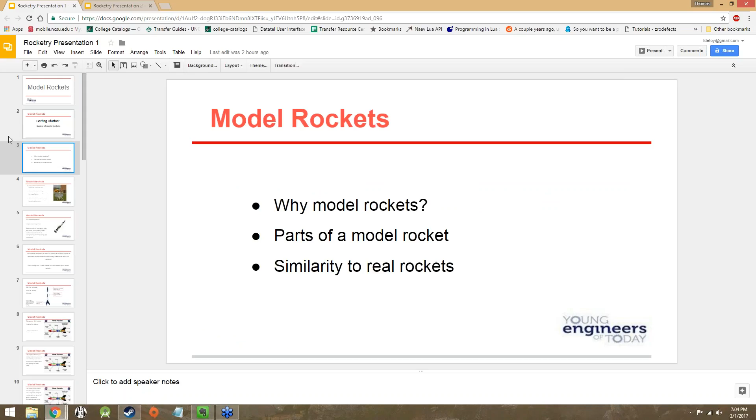So anyway, on Monday we went over just model rockets in general, why and the parts and the similarity to real rockets, sort of. We'll go a little bit more over the similarity to real rockets. There's not a whole lot more there though. But yeah, model rockets are smaller versions of rockets used in spaceflight, hence model. Duh. Many of them emulate early rocket designs, however they can be whatever you want if you're patient enough, like this little model of a Saturn V here, because you can customize them to make them look like really whatever you want. Within reason, obviously.

You can't make like a bowling ball or something like that because it's not really going to fly all that well, even with model rocket engines. I'm sure if you slapped on enough, but I don't think you want to slap a bunch of model rocket engines on a bowling ball and let that thing fly, because then you've got a very fast moving bowling ball, and that would just be bad for everybody involved. But for the most part, there is a certain degree of customization that model rockets offer.

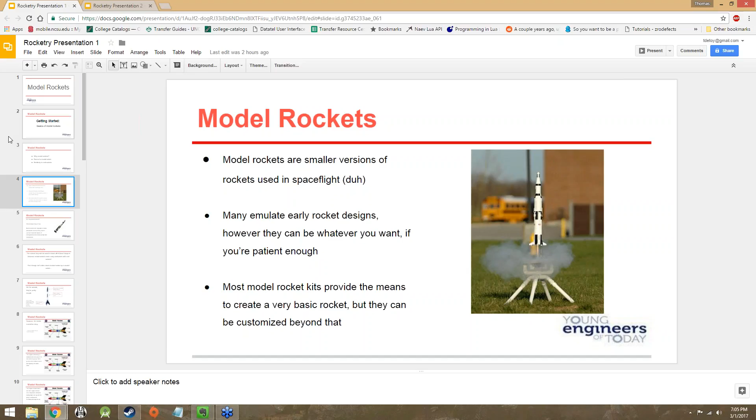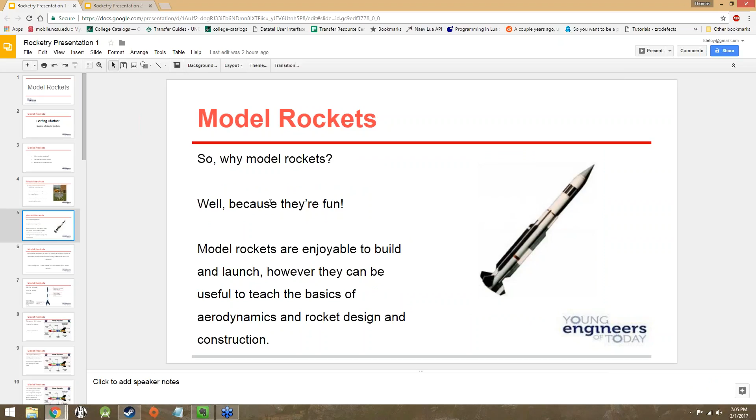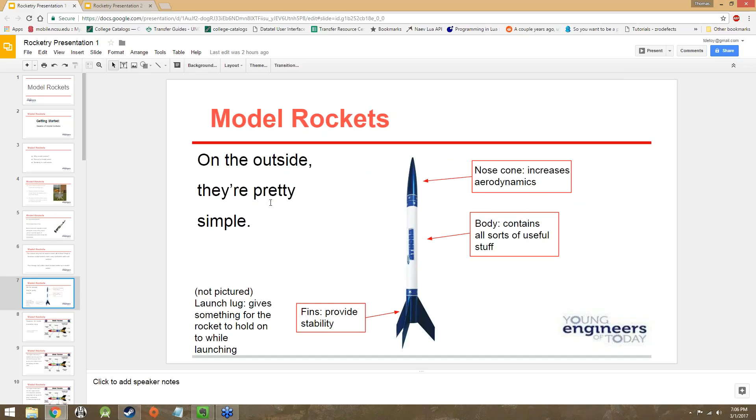And why specifically? Well, because they're fun. They're enjoyable to build and launch, but they can be useful to teach the basics of aerodynamics and rocket design and construction. So there's that as well. The reason they can be used to teach all these things is because model rockets share a lot of similarities with real rockets. A model rocket basically has a nose cone, a body, and fins. No surprise there. Fins provide stability. The body contains all of the recovery systems and everything like that. The nose cone increases the aerodynamics of the rocket, decreases the drag.

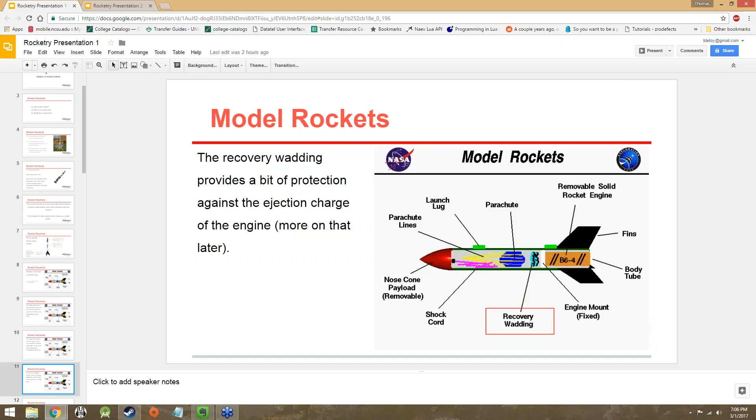The inside, though, you're going to have your engine and your parachute or some sort of recovery system, your shock cord, things like that, the engine mounts. Basically, the engine makes it go up. The engine mount makes sure that the engine doesn't go anywhere. The recovery wadding makes sure that when the engine deploys its ejection charge, that is to say, its blast in the direction that goes inside the rocket, the recovery wadding absorbs a lot of that heat and force, enough so that the parachute and stuff like that isn't damaged, but it still deploys.

The parachute or the recovery system in general makes sure that the rocket floats down more or less gently as opposed to just crashing down to the ground and getting damaged. Shock cord keeps the nose cone connected to the rocket, ensures that the nose cone being blown off doesn't actually stress the rocket body or the rocket in any way. Parachute lines keep the parachute attached. Duh. Launch lugs keep the rocket attached to the launch rail so that when it's lifting off, it has enough time to gather speed to allow the fins to be effective.

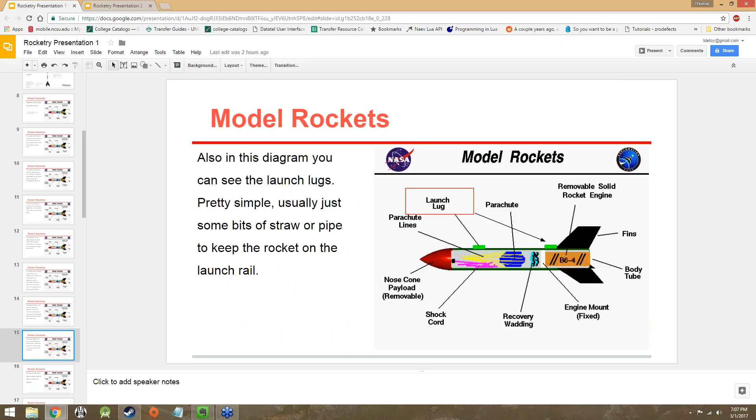And then we talked about what was actually inside of the engine itself. The model rocket engine itself tends to have a few stages to it. There is, of course, the clay nozzle, which provides a bit of directed thrust so that the rocket will actually have more thrust downwards so that it will go up more effectively and faster. The propellant is basically the rocket fuel.

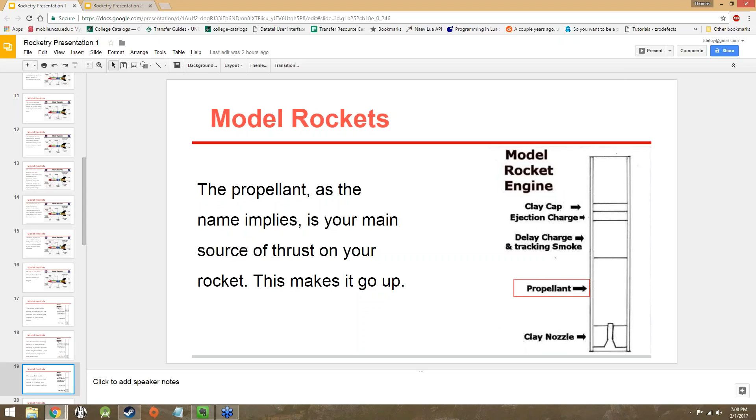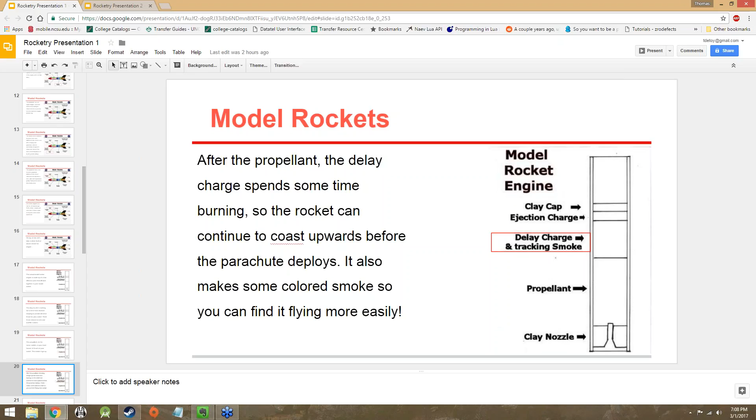That goes off in order to make the rocket go up. The delay charge and tracking smoke is basically just some dead time in the rocket's launch so that it can continue to coast upwards and not immediately deploy the parachute and harm the rocket because it's going too fast. In addition, it also provides some smoke so that you can more easily see the rocket up in the sky, because it tends to go up sometimes kind of high and kind of hard to track at that point.

And then you've got the clay cap and the ejection charge. The clay cap mostly just protects the rest of the rocket against most of the heat of the ejection charge, and also provides something that gets shot upwards to force the rocket to deploy the parachute and all that kind of stuff.

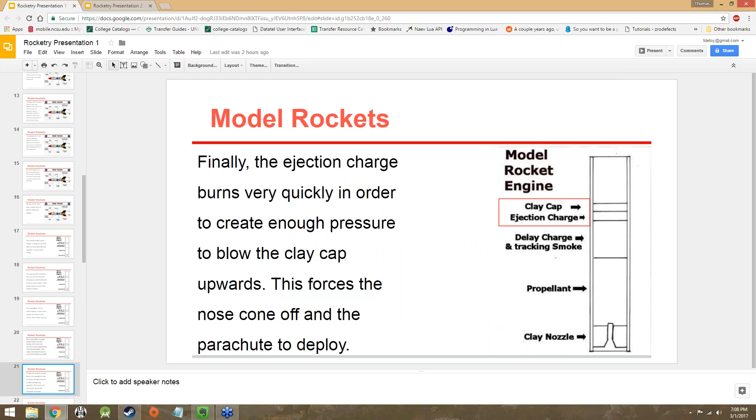So with all that put together, a typical launch will be: you've got your rocket sitting on the launch pad, it ignites, you've got your powered ascent, which is where the propellant is burning. The propellant runs out, then you have coasting where the delay charge is burning. Usually you get a little bit of smoke out here as well. Then the delay charge runs out and you get the ejection charge. The ejection charge fires, the nose cone pops off, the parachute comes rolling out, or the recovery material deploys and allows the rocket to descend slowly back down towards the ground.

And you can pick it up and do it all over again. Replace the engine, put in some more recovery wadding, repack the parachute or recovery, whatever, and then do it all over again. So that's essentially the very, very basics of model rocketry. Now, it doesn't cover everything, obviously, but it does sort of give an idea of how these things all work together in order to create this flight path.

The launch lugs keep it attached to the launch rails so that it launches more or less straight. The fins engage during powered ascent because it's going fast enough to keep it going in the same direction. When the propellant runs out, then it goes into coasting flight where the fins are still working, although not nearly as well as it slows down. The rocket becomes more top-heavy as it expends its propellant, then starts to turn.

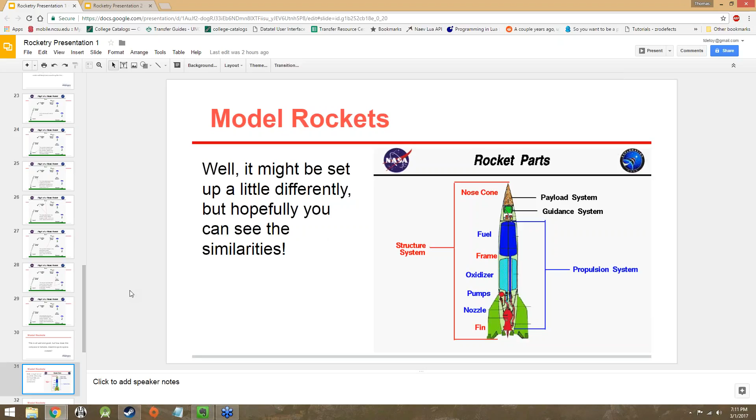So you've got a sort of recovery system. Now the payload system up here in the nose cone can be whatever, but this can also include a recovery system, even if it's just for the nose cone itself and the payload that's inside. Model rockets are a bit unique in the sense that more of them tend to be recoverable than much of real-life rockets. A lot of that has to do with the fact that real-life or spacefaring rockets go a lot higher, in this case space, or the edge of space, and they have a lot further to fall.

On top of that, a lot of times they're just kind of meant to burn up in the atmosphere on reentry. A lot of these rockets are meant to be disposable and just kind of be disposed of that way. That is, of course, if they're ever meant to return to the surface at all. There are a fair number of rockets as well that fly up into space, get into orbit, expend their payload, and then they float in space as space junk. Not ideal, but it is something that we as humans have done for a very long time now.

Now it's something that we're trying to get away from as well, because space junk is becoming a very real problem, but it is something that exists. If you've ever seen the movie Gravity, that is something that sort of explores the repercussions of space junk.

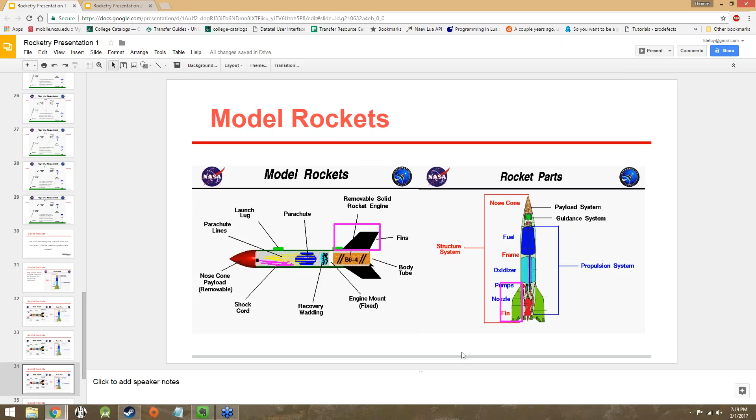This is an interesting side note before we move to the second presentation: many rockets don't actually have fins. We build model rockets with fins, and you might think of rockets with fins, but you can also look at plenty of pictures of rockets without fins, which is odd, right? I've been harping on the fact that fins provide stability and keep a rocket from veering off course. Why are there rockets that don't have fins then? What possible purpose could that serve? Why would you deny yourself that additional control?

Well, you don't always need fins to have control over a rocket. A rocket can also have gimbaled thrust. This is beyond model rocketry because gimbaled thrust usually involves a guidance computer, advanced servos, and a gyroscope. Essentially, if the rocket starts to precess, tilting off course, the gyroscope will sense it and send information to the guidance computer. The guidance computer will detect it's off course and tilt the nozzle at the bottom of the rocket to adjust the thrust so it's continually heading upwards. The rocket corrects itself by shooting the thrust slightly laterally. I think that's kind of cool - the fact that we have rockets that can correct themselves by changing the direction the thrust is coming out.

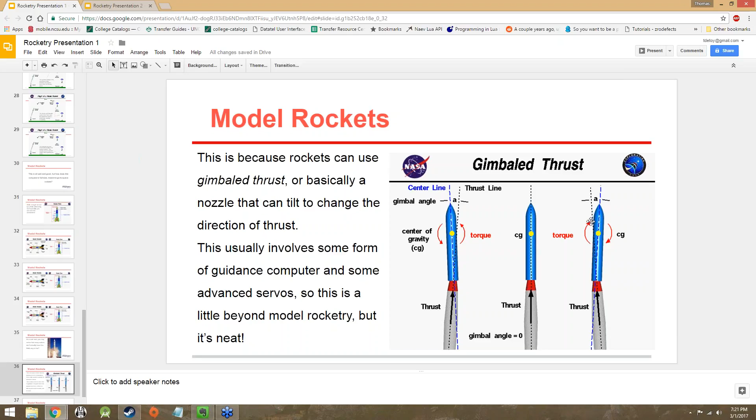All in all, the main difference between space rockets and model rockets is their cost, power, and purpose. Model rockets are meant to go up a little ways, come back down, and demonstrate aerodynamics and fluid dynamics. Space rockets are meant to go to space, applying that same knowledge model rockets give you in order to take a rocket all the way into space. But they work the same way - they provide directed downward thrust using a chemical reaction, and they have the same concerns: recovery, stability, and efficient use of fuel.

They're very similar in those respects, and that's why model rocketry is a stepping point for a lot of people to move into aerospace. There are a lot of people out there who say the reason they got into the aerospace engineering industry is because they really loved model rockets when they were younger, and it put them on this path - they had a passion for it and really liked to do it. So that's a big part of the reason why. It's something that we still do.

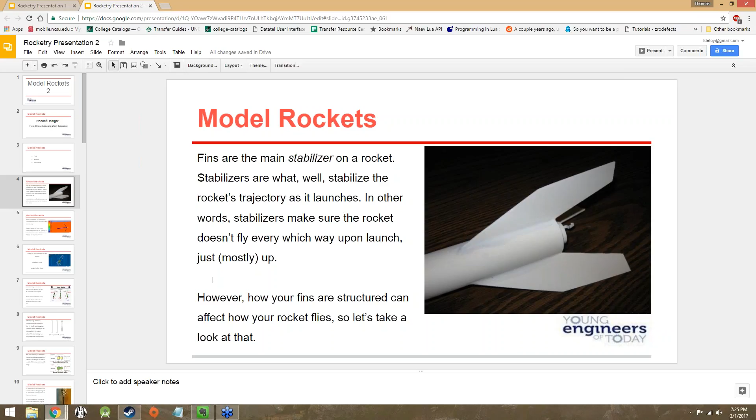But before we really get into it, it's important to understand the forces at work on a fin. The biggest one being drag. Drag is a force, and it's just the force of the surrounding air on the fin working to slow down the rocket. Think of it kind of like friction, but from the air itself.

If you've ever been in a car and stuck your hand out the window, you can feel the air sort of pulling your hand back. You might have your hand out sideways, palm facing towards the ground, and sort of do like that, my hand is flying kind of a thing. I don't know, maybe you're not weird like I am. But then, while the car is moving, you might flip your hand so your palm is facing towards where the car is moving, forwards, and then you can really feel the force of the air on your hand.

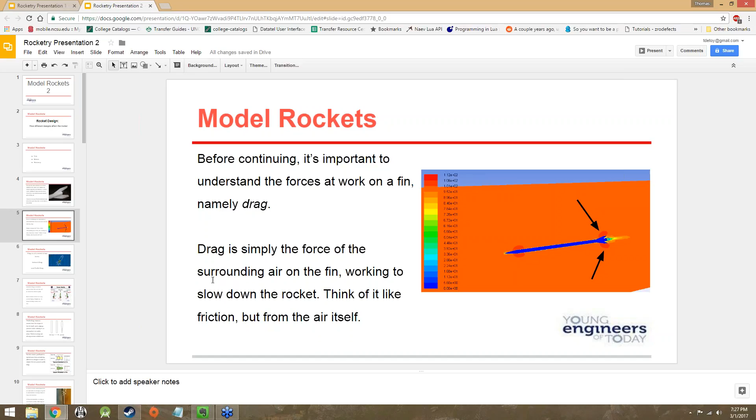That is drag. Drag always exists as long as there's an atmosphere and as long as there's some sort of acceleration or velocity, movement. So drag is an ever-present problem for people who design rockets and airplanes, and it's something you have to constantly think about, and sort of not only counteract but twist around so it's working in your favor. It's a very real design concern for rocket designers, so it's something we have to take into account when designing fins for these rockets.

So drag on a fin comes in two forms. You've got induced drag and profile drag.

This is definitely a thunderstorm. I don't know if you could hear that thunder in the background, but I have the windows open, and it is definitely storming.

Anyway, drag on a fin comes in two forms: induced drag and profile drag. As you can see in this diagram, drag is actually created by the airflow, but it pushes down on the rocket and works directly against the thrust of the rocket. So that's something that, when launching a rocket to go to space, funnily enough, you don't want the most thrust at the bottom of the launch. You actually want to ramp up the fuel usage as the rocket gets higher in the sky.

Why might that be? More drag somehow. Why might there be more drag? More airflow. Yeah, basically. I mean, the answer is actually deceptively simple.

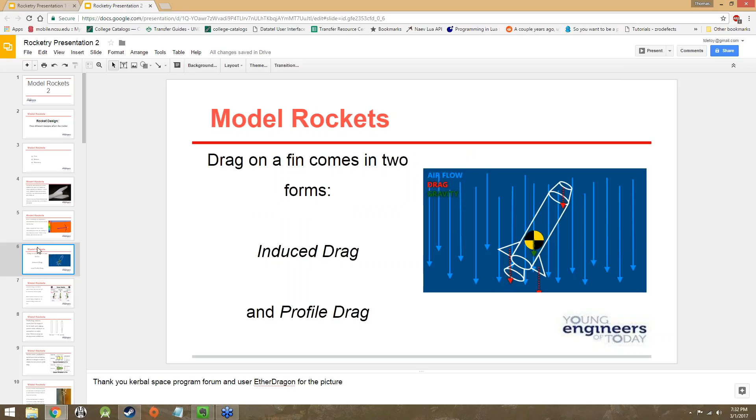So, induced drag and profile drag. Induced drag is created when the rocket fins use the air to correct a rocket's path. This doesn't happen all the time. Most model rockets do very well at flying straight up, so induced drag tends to be low. It really only happens when the fins are actually gripping the air to try and correct the rocket's path, fighting against precession or wobbling in order to keep the rocket flying straight up. That's when induced drag happens.

Since model rockets are light and generally use a tried and true rocket design, they tend to do pretty well at flying straight up. Plus we get launch lugs and stuff like that to help keep it going in an upward direction, getting it started off on the right foot. So induced drag is less of a concern when a rocket is flying. A model rocket is flying, certainly. Although it is something you still want to take into account, and want to make sure is happening at the right times. You want to take advantage of induced drag to keep a rocket pointed in the same direction. Because if there's absolutely no induced drag, well, you've reduced the drag on the rocket, but you have no means of fixing its path in case it suddenly decides to go sideways, literally.

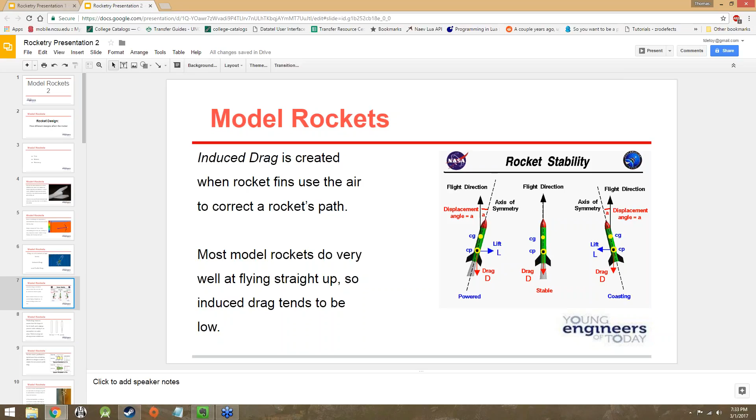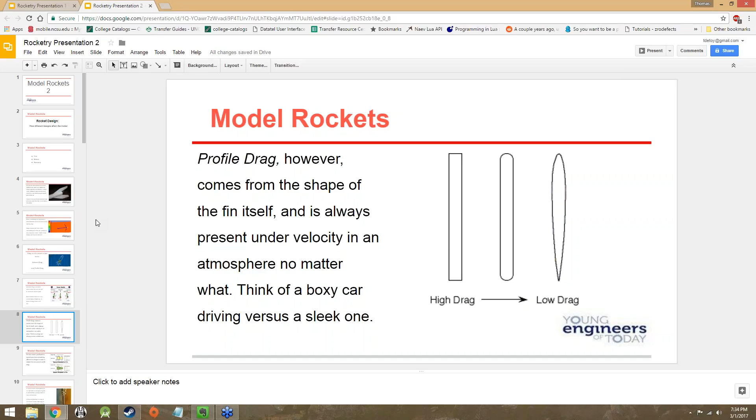Now, profile drag, on the other hand, comes from the shape of the fin itself, and it's always present under velocity in an atmosphere, no matter what. To go back to our earlier example, think about a boxy car driving down the highway versus a very sleek, angular car. A boxy car is going to have a lot of profile drag because it's a box. Like a semi is going to have a lot of drag along the front of it, a lot of drag and turbulence. Then you've got a nice Maserati or a motorcycle going down the highway, and it's going to have very little drag because it has a smaller profile, specifically designed to shift the air up and around it. So you're going to have to think about profile drag. You want to spend time considering different fin designs in order to reduce the ever-present problem of profile drag while still taking advantage of induced drag to keep control on the rocket.

But there's another concept. I know I just keep introducing concepts, but in order to better understand how we can tackle fin design itself, there's another concept that's good to understand called a Reynolds number. A Reynolds number is simply a coefficient or a ratio, a number that helps to describe how turbulent a fluid like air is.

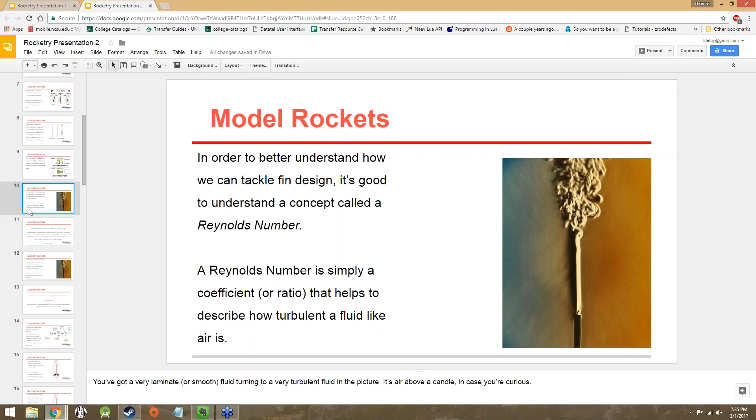I can hear you saying it right now, air isn't a fluid, it's a gas. And, you'd be half right. Technically, fluids and liquids aren't exactly the same thing. Fluid can be synonymous with liquid in a popular sense, but in a physics sense, they aren't exactly the same thing. Think about what you can use the word fluid to describe. Things that flow and aren't solid, right? You think of something that's fluid and it moves. Yeah, exactly, exactly. You get the idea, Benkai.

So yeah, it's something that goes with the flow. It doesn't stay in one place. It's not rigid. It's very malleable and things like that.

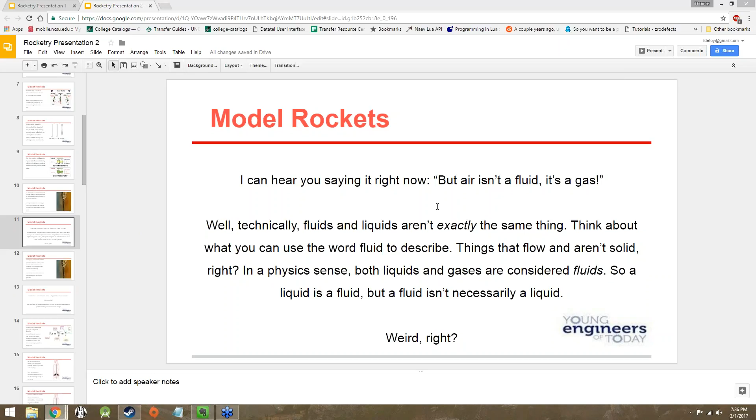In a physics sense, both liquids and gases are considered fluids. So a liquid is a fluid, but a fluid isn't necessarily a liquid, which is kind of weird. If you go into engineering, like mechanical engineering or aerospace engineering, you'll be taking a fluid dynamics class, and that will cover aerodynamics because aerodynamics are part of fluid dynamics.

So anyway, back to this picture, because it's relevant. A Reynolds number describes whether a fluid is very smooth in its movement, or laminar, or very bumpy and chaotic, or turbulent, and where the boundary between laminar flow and turbulent flow exists.

So we can use this number to help predict how our fins will perform. And the reason why this picture is relevant is because this is actually a picture of the movement of air from a candle. This bottom part right here is the candle, and there's a flame, which we can't see because it's taken on a spectrum. I'm not entirely sure what, but this is actually air that we're looking at right here, all of this right here.

So this bottom part is laminar airflow. You see how it's very smooth. It's all going in one direction, and then right about here, it just starts going crazy.

This is turbulent. You're flying an airplane, and the pilot's like, hey, we're going to hit some turbulence, and then the plane starts to wobble a bit — that's rough and chaotic airflow. It's rough and chaotic fluid movement.

Versus how flights normally go, which is very laminar. You got a lot of smooth airflow over the wings and stuff like that. The flight is very smooth. That would be laminar.

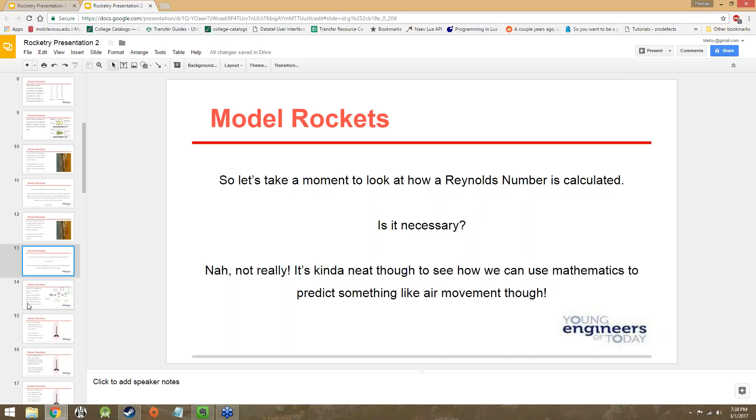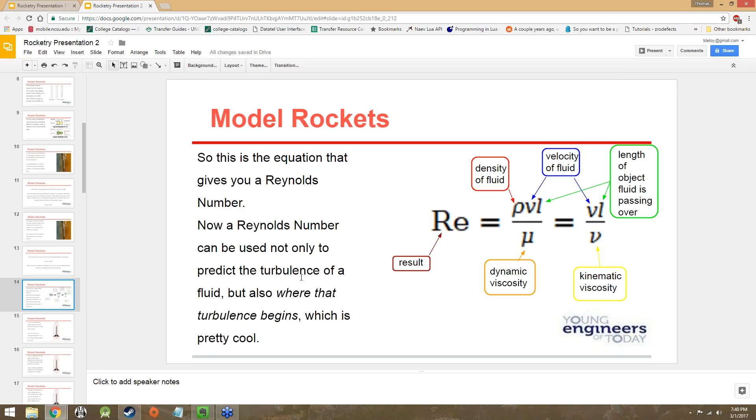So anyway, plugging all this stuff in, you can actually determine the turbulence of a fluid, and you can also predict where that turbulence begins. So in this example right here, you could use the Reynolds number equation to figure out how far above the candle the fluid becomes turbulent, which is kind of neat.

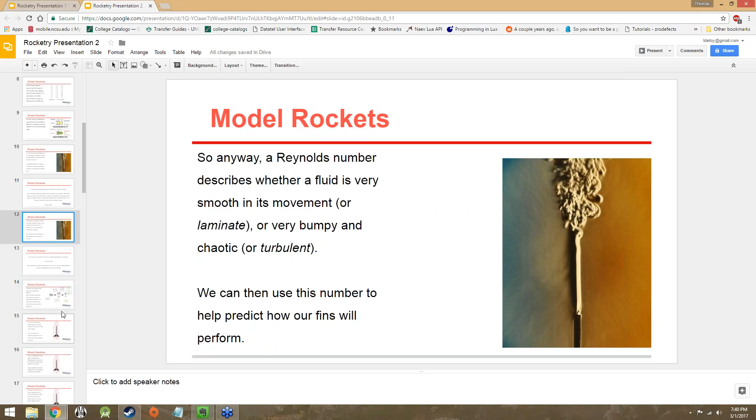This turbulent air is actually very hard for fins to hold onto, to grab onto, and to correct a rocket's path. Fins really perform a lot better in laminar air or smooth air. So smaller fins won't be able to extend past the turbulent part of the air created by the rocket body, which means that they'll be less effective. Larger, longer fins will be able to make use of the laminar air that's around the turbulent air to keep the rocket steady. But we can't just make super big fins, right?

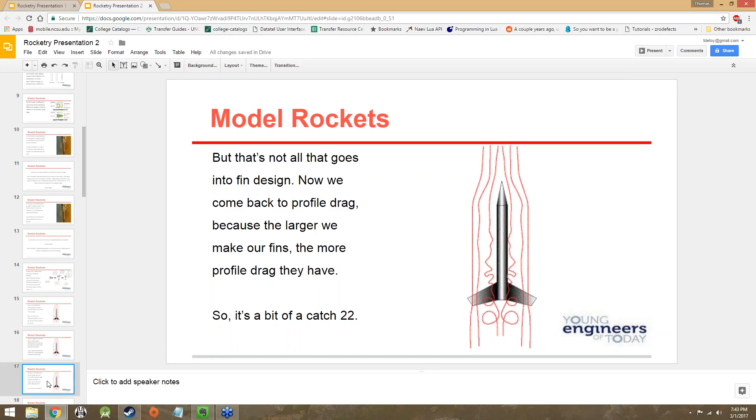You want to have the fins small so they don't have a lot of profile drag, but you want the fins large so that they can get to an area with a pretty low Reynolds number, and that is smooth airflow.

But, you know, we actually have a choice over that too. The actual shape of a fin starts to come into play now, and it becomes far more important how we construct the fin itself. So we know a large fin is probably pretty ideal, but what about the shape?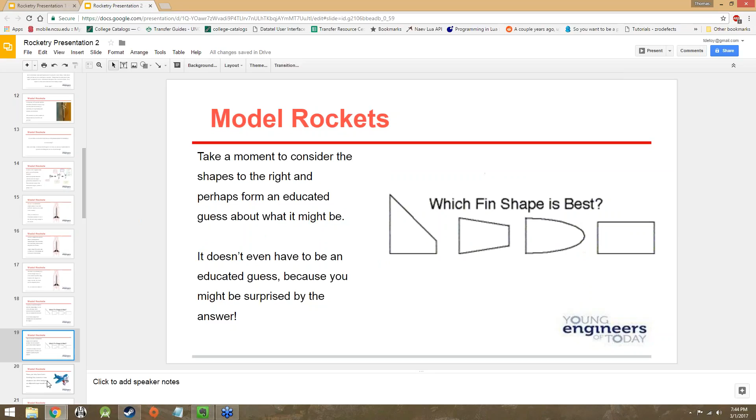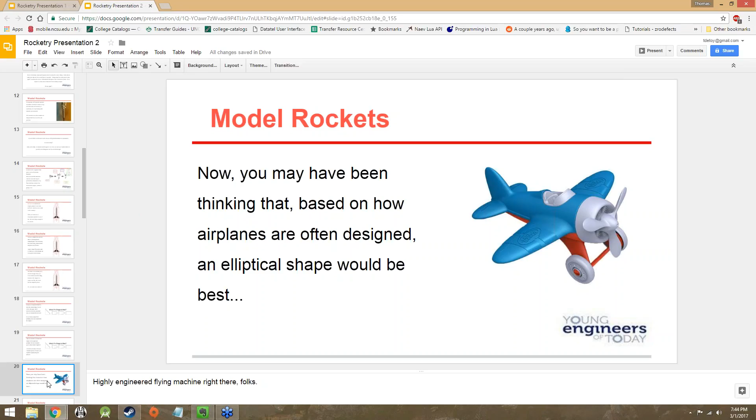Yeah, all right, so I don't know, maybe some of you might have thought that an elliptical shape would have been the best one, like number 3. Nobody said 3, so apparently you guys are smarter than that. But, you know, look at that airplane, look at that highly technical piece of equipment. Kind of based on that, you might think, oh, we want an elliptical shape because that's a tried and true design. That's what we use in aerodynamics already.

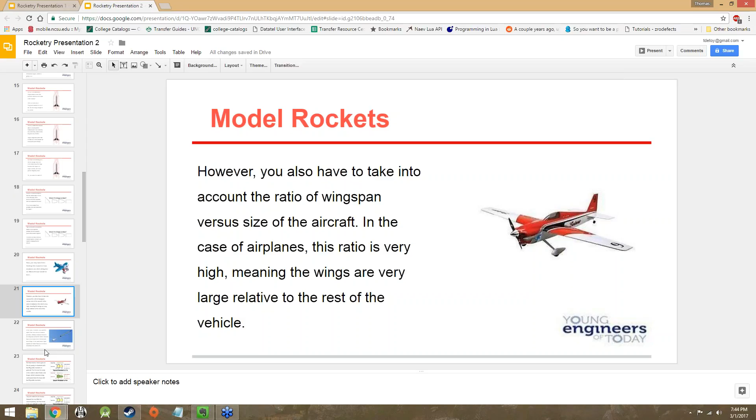But this is not a complete answer because you also have to take into account the ratio of the wingspan versus the size of the aircraft. In the case of airplanes, this ratio is pretty dang high, meaning the wings are very large relative to the rest of the vehicle. Not so with rockets. You want the span of the fins to be as small as possible. I know I said you want them to be large, but you also want to make sure they're as small as you can get away with—large enough to take advantage of laminar airflow, small enough so that they're not creating a whole ton of profile drag.

Rockets have to be much more efficient with their usage of fuel and tend to fight against the air because they're trying to get out of the air rather than use it to their advantage like planes do. Planes take advantage of the air in order to keep them up in the air. They're sort of a fundamentally different design with the wings. Rockets are trying to cut through the air as quickly and efficiently as possible so they can get to the point beyond the air. They don't use their fins like airplanes do with wings. When I say cut air, I just mean redirect molecules around the wings and stuff like that—not literally cutting the molecules or anything like that.

Yeah, I mean, in a poetic sense, I suppose so, but in an actual sense, there would be a whole lot of energy released if molecules were actually being, you know, broken by planes flying past them or rockets flying through them. Whole lot of energy. Whole lot of energy. Can you imagine if atoms were being changed by it? Just nuclear explosions going off in the air. Little tiny ones.

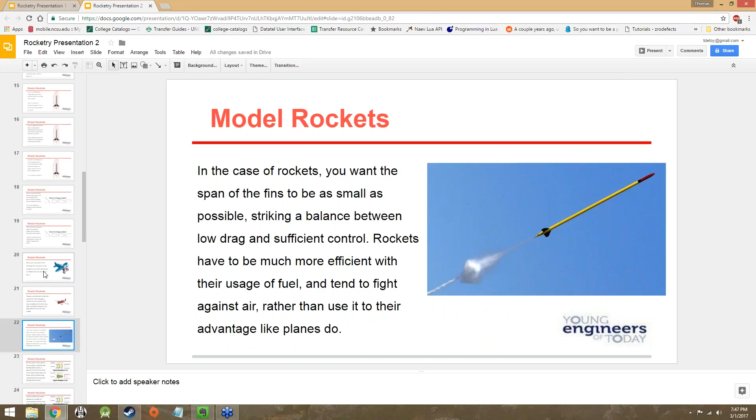Anyway, for this reason, elliptical fins tend to do pretty poorly in situations with low Reynolds numbers anyway. So that is to say turbulent air. We already knew that from airplanes. But also the area by the rocket body is not going to do very well. We already knew this because we mentioned it up here. But they tend to do particularly poorly with that, which means that they'll need to be larger anyway.

Then on top of that, the fin near the body of the rocket tends to also be thicker and longer. Like you can see here in the expert modeler's fin's edge view, the part of the fin that's closer to the rocket is thicker than it is by the edge of the fin. So these cross sections are, you know, progressively getting smaller. Now, granted, these cross sections are also progressively getting smaller, even though the edge view here is the same. But regardless,

whichever way you go with an elliptical fin, you'll need to extend the fin further outwards in order to take more advantage of the largest part of the fin, because if you use a larger part of the fin, it will be more effective at leveraging the air in order to keep the rocket stabilized. Now, granted, the edge of this is also going to have lower drag, but it's generally not enough to counteract the fact that it's not going to have a whole lot of control either. And on top of that, the fin near the body is thicker, which increases the drag and exacerbates its issue with low Reynolds numbers.

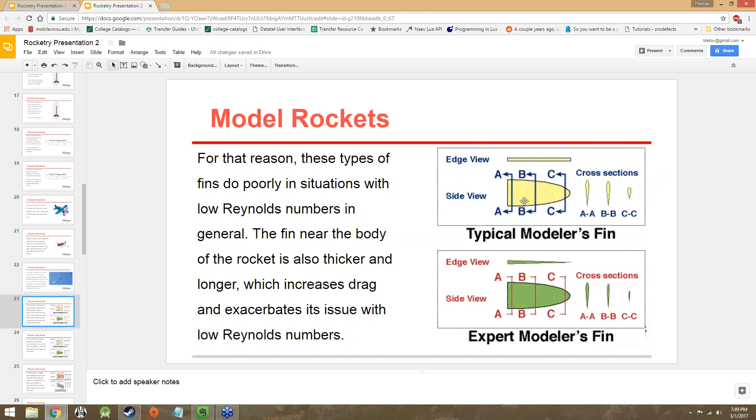So if you make your rocket body more aerodynamic so that there is less turbulent air near the base of the fin, that's just a bonus, because the closer you get to the base, you have the same exact effectiveness. Whereas here, it's kind of a necessary thing in order to engage the larger parts of the fins and have more surface area there. Now, this isn't to say that your rocket won't fly well necessarily with elliptical fins. It just will tend to fly better with rectangular fins. So, something to consider.

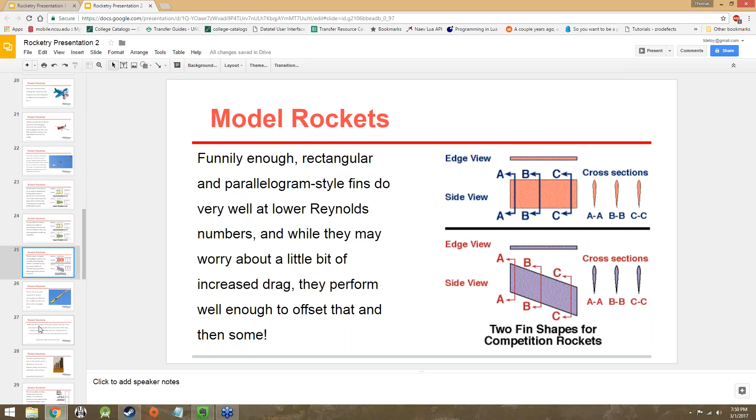And yeah, rectangular fins are going to have more drag because they're going to be generally thicker and larger anyway, but they perform well enough to offset that and then some. So overall, you have generally better control. This is all a bit counterintuitive, but math and physics are funny like that sometimes. But that's why engineering is an iterative process. Sometimes the crazy seeming ideas are the ones that work out the best. Once you've exhausted all the things that seem sane, you go like, hey, let's try rectangular fins. And somebody's like, well, that's dumb, but I guess we got nothing else to try. And they fly it and they go, hey, that actually worked out pretty well.

I won't get started on motors yet because that's going to be our topic for next Monday. But yeah, I think we got through that at a pretty good clip. Covered a decent amount of information on fins. A lot more than you might have thought. You might be like, oh yeah, fins should be triangular shaped because they should be. But there's actually a fair amount of math that goes into it, and I've really only introduced you guys to the very surface of it. Like we just scratched the surface.